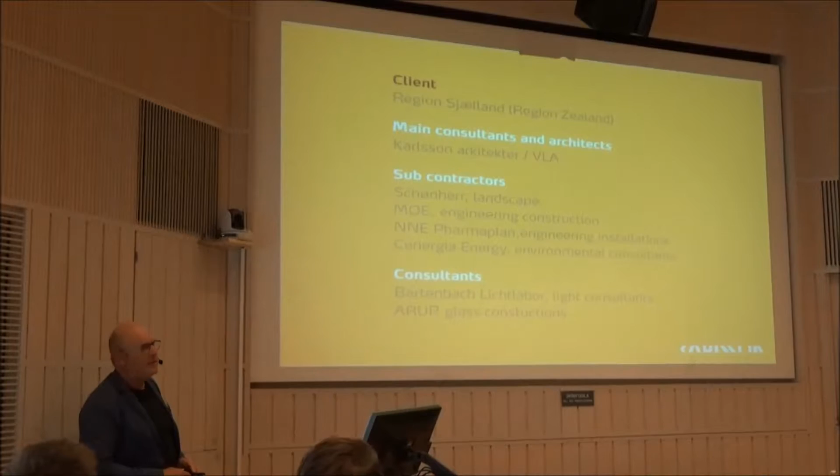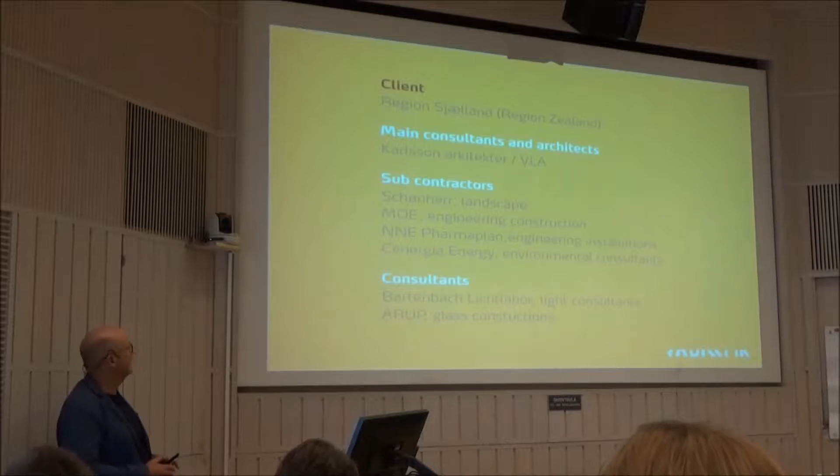The client is one of the 5 regions in Denmark, the region Zealand, the smallest in population, but the biggest in area, and they wanted to be very ambitious about trying to make a hospital to ensure the quality and the equality of the work with psychiatric patients.

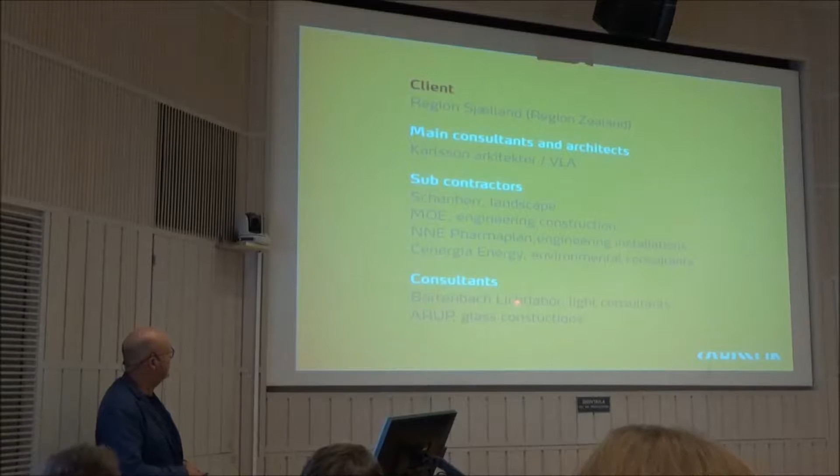These are the participants, and you could notice Karlsson arkitekter with the landsting, and also NNE Pharmaplan, who's been working with the engineering of the installations, the light, the electricity, and Bartenbach from Austria, who has been consulting on the light design, both daylight and artificial light. This is me.

The project is a part of the investment going on these years in Denmark for mainly somatics, but also psychiatry. And this is a project we've been working with.

It's between Odense and Copenhagen, but as I said, a huge area, any scale anyway, with a very spread out population.

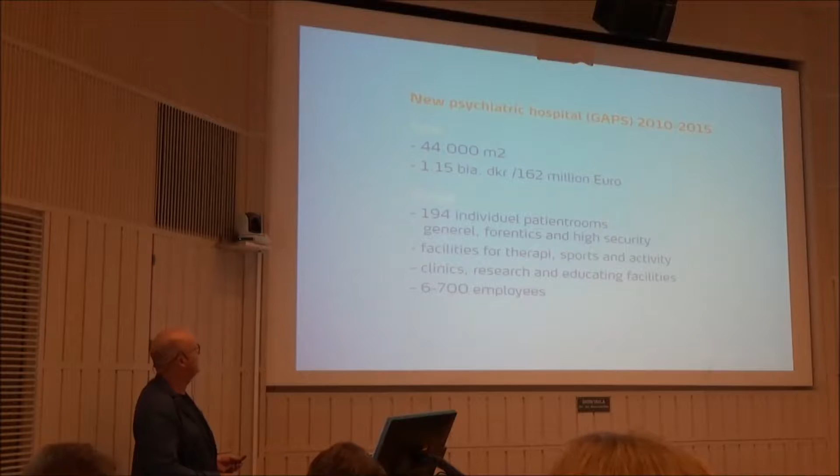These are the figures. Approximately 200 individual patient rooms with the facilities going with that. Clinics for 200-300 daily visits, research, education.

44,000 square meters, and it's a small amount of money in the overall investment going on, but it is absolutely the biggest investment in psychiatry in Denmark in this period, and for about 150 years or something. It's the biggest and most ambitious investment.

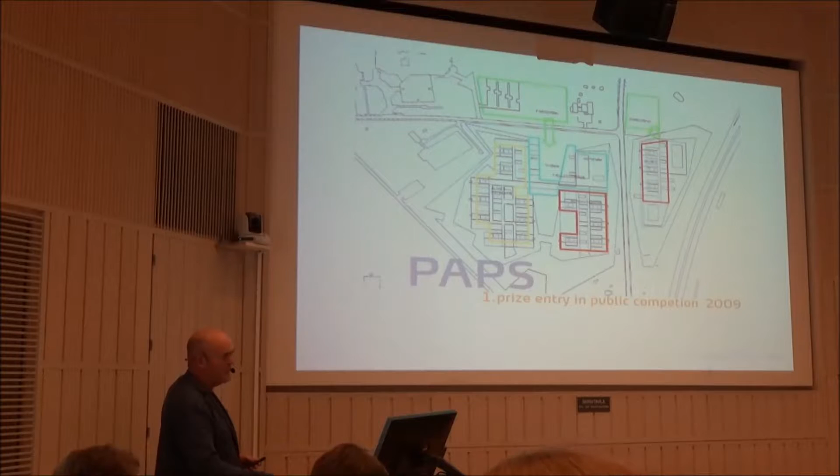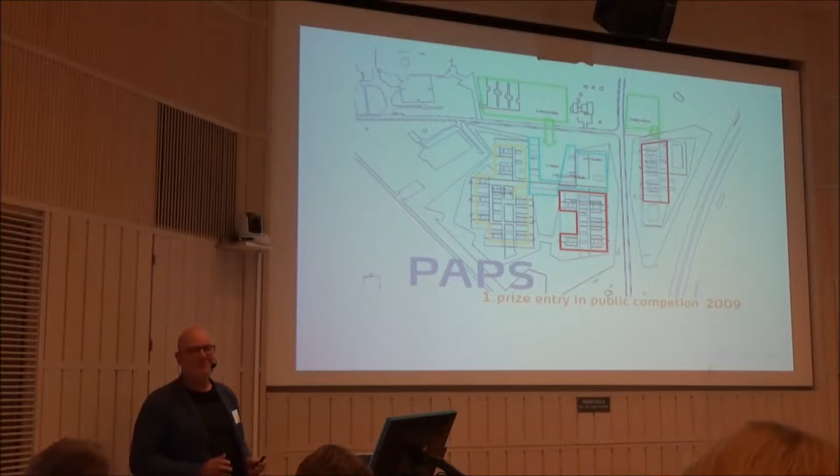Very, very ambitious, very dedicated client, a two-phased competition, an open competition which we won. And I have a very small firm. We're not 300 people, we only have one office. We are 10 to 12 people, but engaged into each client relation and each project.

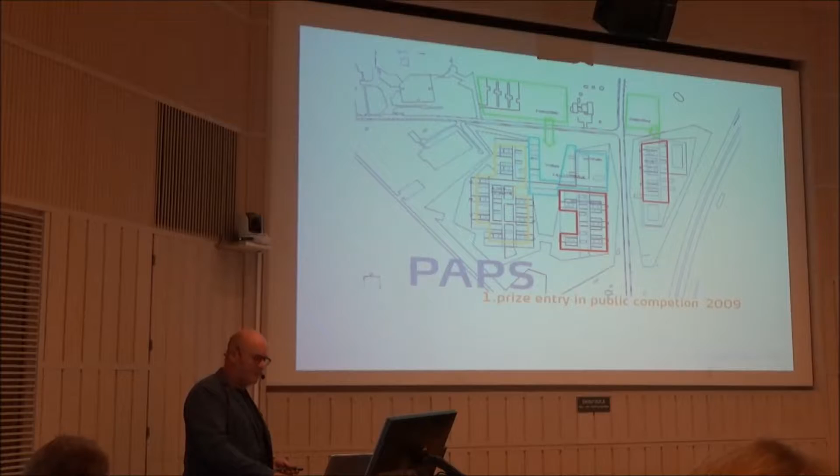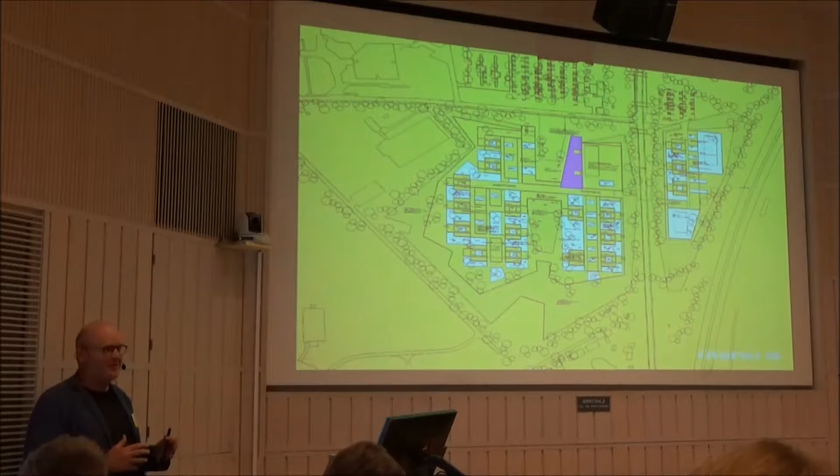We had no experience, and few had basically experience with how to build the new facilities for the new way of treating psychiatry. But we won this competition, and we went into this work open-minded, based on some basic ideas, and then entered into a close relationship, working together with the psychiatry. Psychiatry learned about architecture, and we learned a lot about treatment of psychiatric patients. This is the basic idea.

I have to show this before I talk about the light, because we can't separate light from space. We can't separate space from materials. We can't separate the program from time, economy. Everything works together when you're dealing with architecture, making architecture.

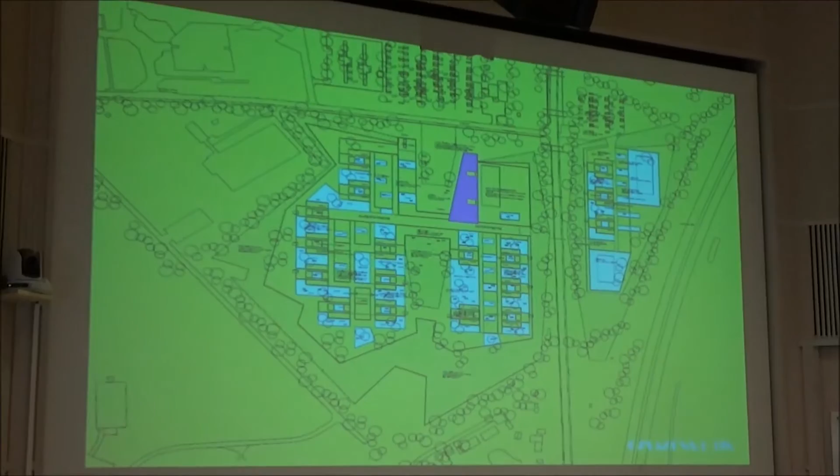This is the site from the early stage. It's a green site, some old football fields. But we turned this around to say we're not going to build in a park, we're going to build taking the park into the building.

And that has to do with how psychiatric patients and treatment actually works. So our ambition was, at this level, to be able to deal with all the programming that was coming into the project in the process to be expected, and to make sure that we could make different kinds of realities inside, according to each patient, each state the patient is in, in the process of recovery from very sick to well. And that also has to do with light.

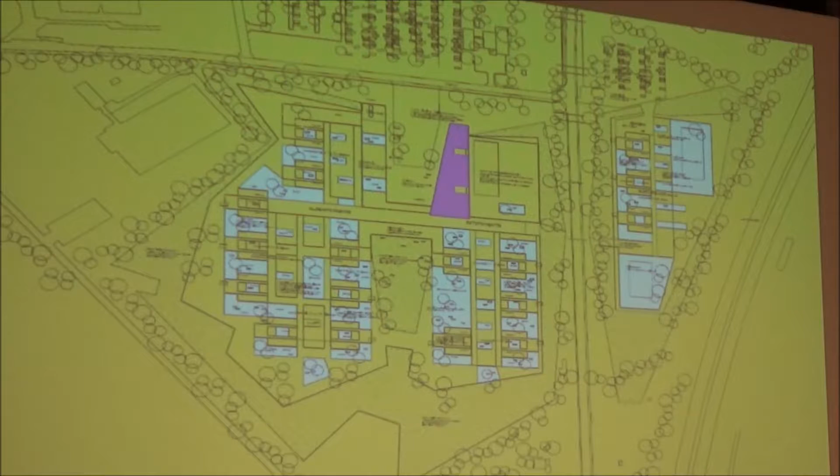So basically, around courtyards, closed from the outside, but open inside itself. And then one point rising up to show an investment of 1.2 billion, the ability of competence, of education, of research, and so on.

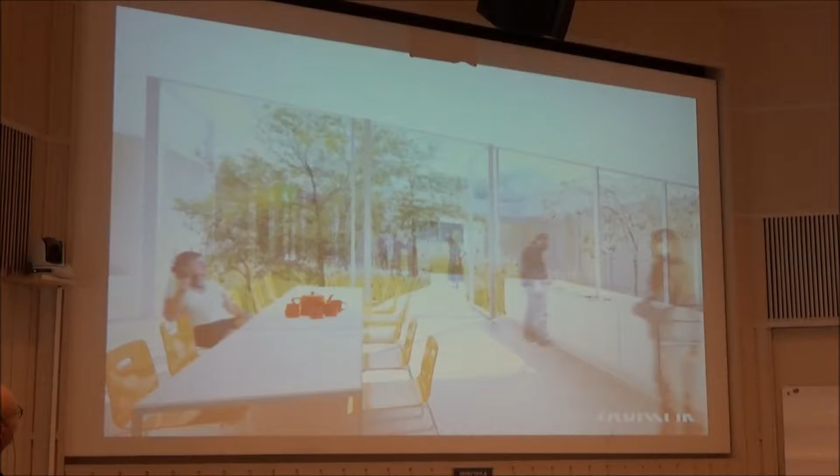These are drawings going quickly through from the competition, showing the ambitions at that level for the project. That sort of speaks a bit for itself. You will want to ask anytime within the limit, of course, of time. But as you can see, light and access to outside is from the beginning a very, very important issue.

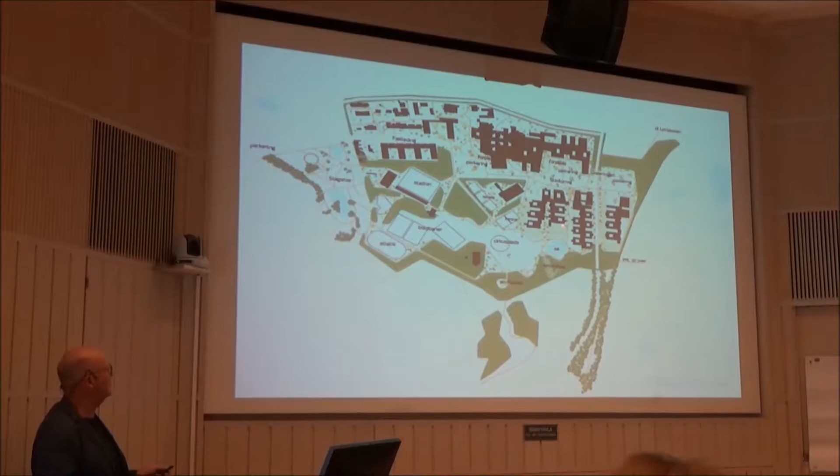This is from the atrium and the competence center, as they call it, the high rise. And this is the site. It's urban, not like Stockholm or Copenhagen, but it's an urban structure, and it's a recreative structure, so that the park from the center of the city actually goes through the new hospital and allows access from the public into the hospital.

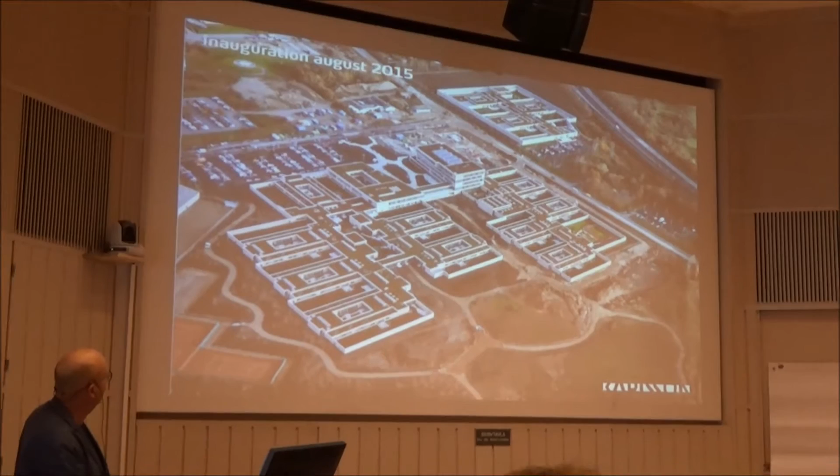This is the site, almost finished last year. You can sort of see the layout as it is. And these are some keywords.

I've just touched it, read it yourselves. What was values and goals in the work with the psychiatry?

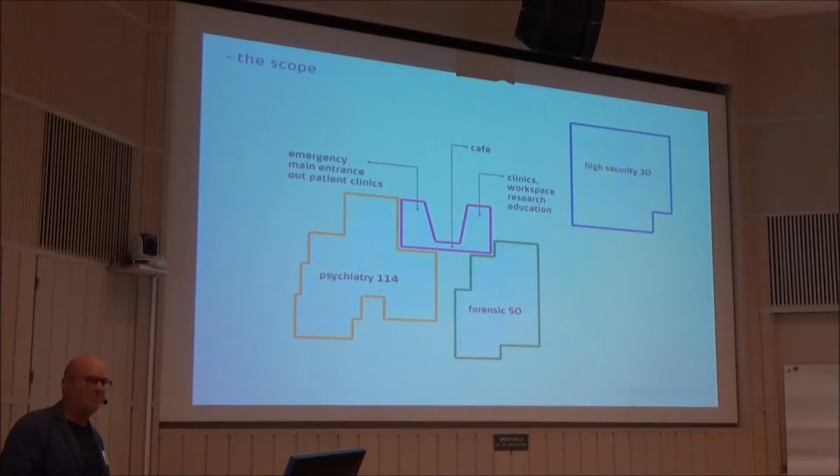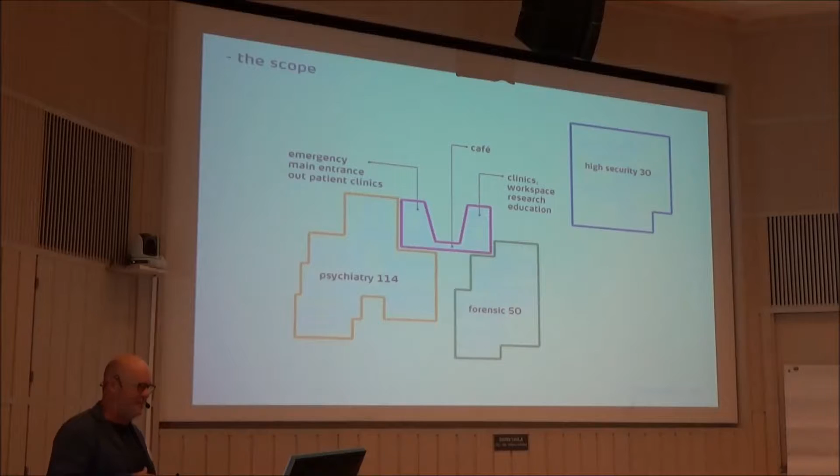This is the scope of today, basically, just a layout. There's a lot of difference from general psychiatry to high security psychiatry, as some of you probably know. But we have worked with the same topics in dealing with how to support the work with psychiatry, though it is of course different between general psychiatry, forensics, and high security. We'll show you something from general psychiatry, where it has been possible to work with the ideas mostly, and therefore most interesting to see.

Basically, we organize wards based on the idea of having a social structure for a patient to deal with, and also for the staff to have a known base to work in. Staff and patients know each other. You can't just move staff around the psychiatry hospital, because then you lose the knowledge of each patient, and if you lose that knowledge, you can't give empowerment to each patient, and you sort of have to start all over.

So this is the structure, but behind it there are competences coming, working from workspace bases and working in different kinds of rooms, from informal rooms with no real purpose, like meetings we probably have had this morning, you just meet somewhere and get into a conversation, to more formal meeting rooms, activity rooms, and sports rooms, etc. Working patient to patient and patient to staff.

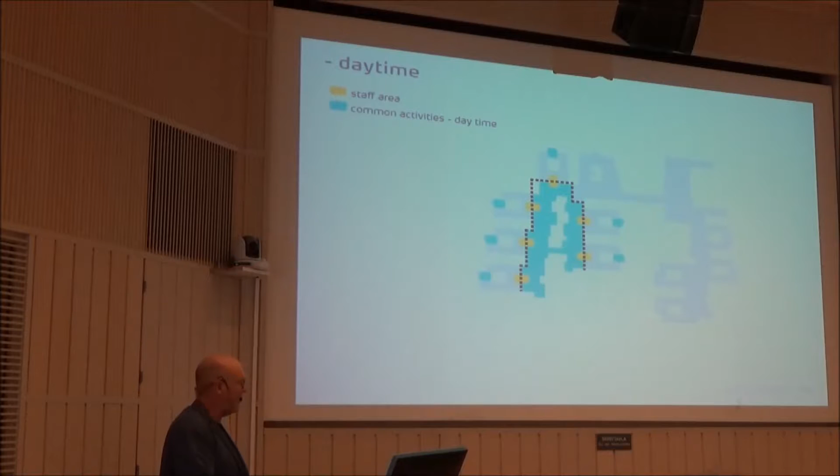We call these pigeon rooms - I think it was my word once. Like, you know, when pigeons, they sort of come back and sit together and move their wings, and they have messages to share. This is where you meet, and you know that you can meet each other.

This is then how we can organize it - it has not to do with patients, but you can actually have 2-3 wards working with the same treatment topics and so on.

So that's how we got together after we won this, the real task. That's how we work - we want to find the best co-workers in the areas that we don't cover ourselves.

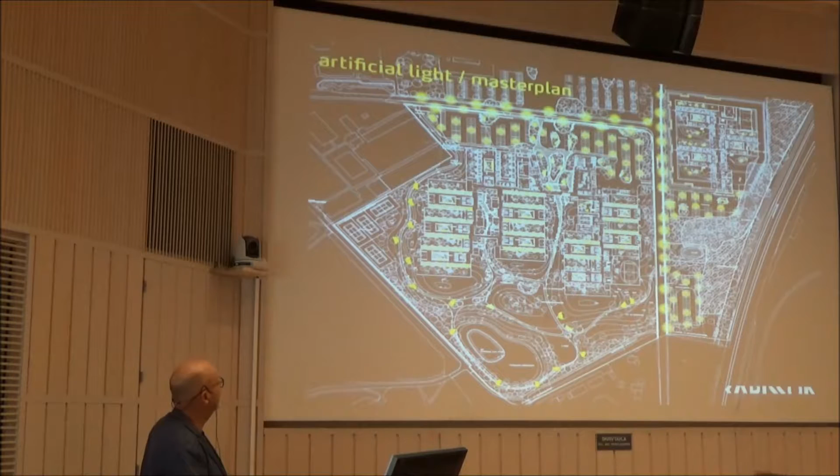This is just to show that the planning included everything, not just one room, not just one lamp, but the way the building sits on the site, the way you move around, and the way it shows itself during the night.

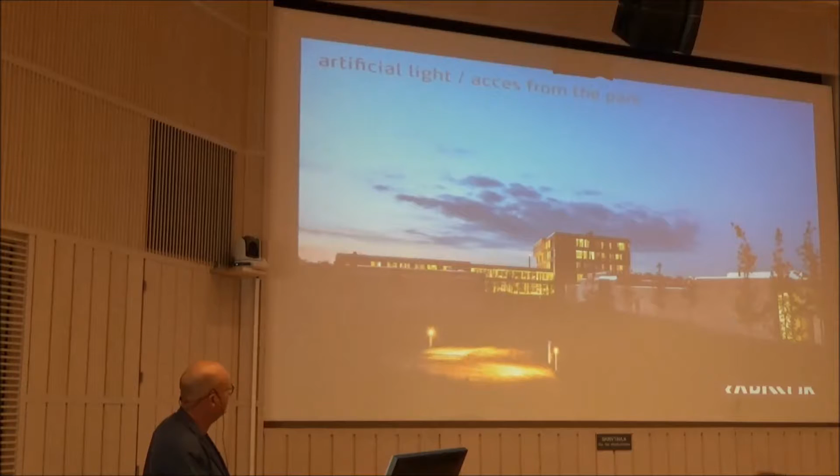This is from one month ago, I think, and you can see the closed one-storey buildings, and the high-rise which is still open here, late evening. This is the main access to the building that shows itself when you enter.

It's been very important for us to work with the architecture in a way that, if you're a patient entering this house for the first time or even the second time, this is not the best days of your life. It's very important that the architecture is not the architect's dream that might scare you or intimidate you. We really wanted to keep everything very simple, very easy to understand, and still of course have the expected complexity.

Basically, the idea is that we have a hierarchy from the patient room with very few elements, very few stimuli, and then different levels where you can work with patient and staff, and you end up in reality, because the whole idea is to return to reality and be able to work in real life, though you might have some psychiatric disease.

This is the biggest one, this is the outside, you might say. This is pictures from the entrance, and these pictures will show you some of the way we have been working with light. This is an entrance that I think could be a school or a small business or something.

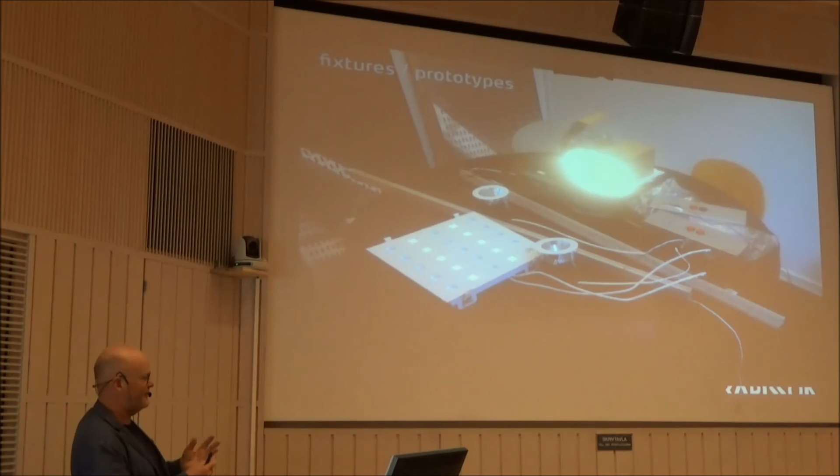Yeah, these are just pictures to show it's custom made into the house in any way - the bulbs, the curves, and the positions, to give the difference of light.

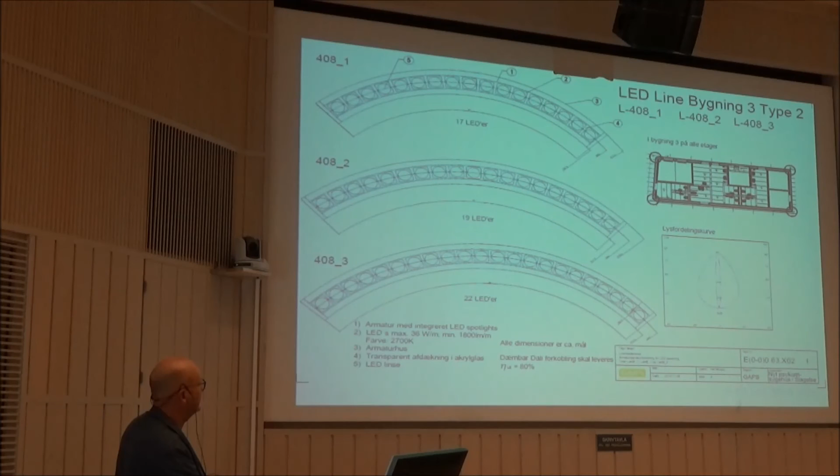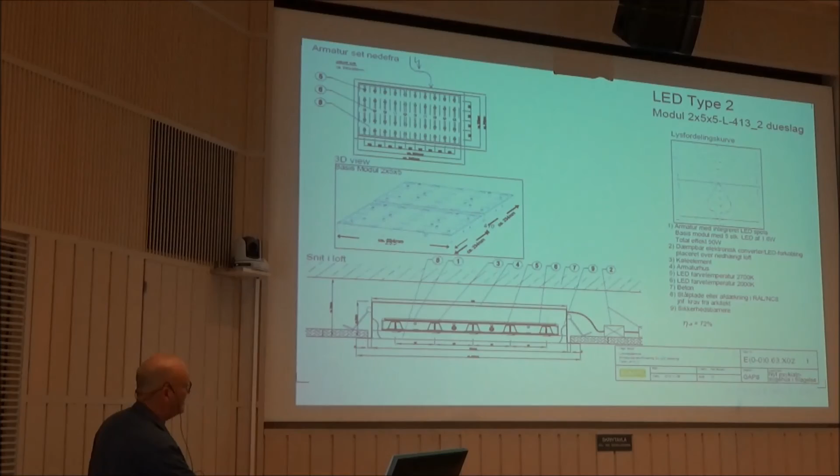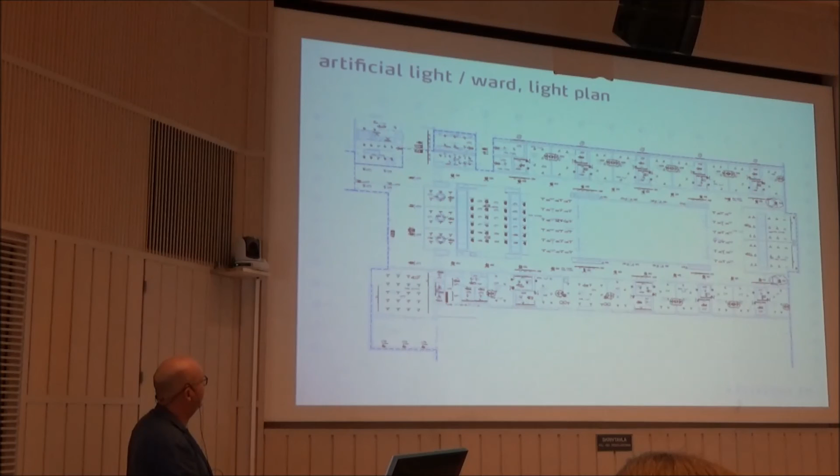And this is just the schemes. You can see from early stages that we define where to have, and not the same level of light everywhere - we want the light to be different. That's interesting, we like that, and it shows where activity is going on. There's a plan of fixtures that follows that. And this is an example of these milieus we've been working with.

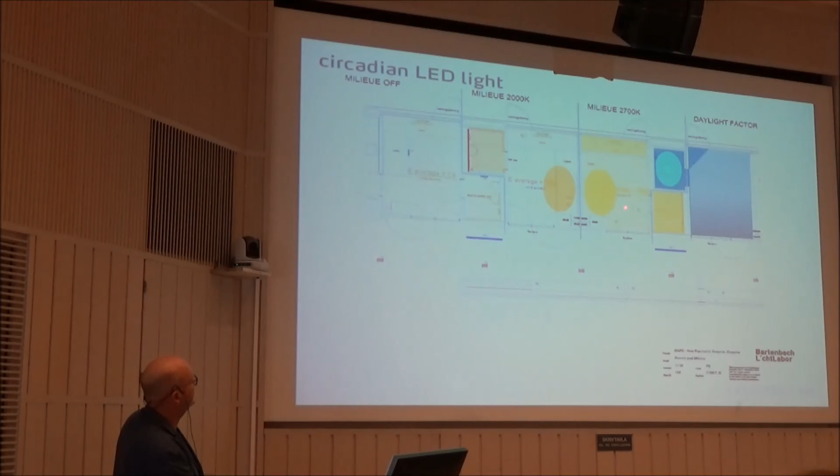The scenario is in a patient room - from nothing basically, very, very little in the night, then 2000, 2700 - it's not quite that way, but still, it's a basic idea to work with, and then the daylight.

But I showed it - I promised the client not to, but I showed it because now, after 6 to 9 months, we have some results already about the house anyway. We don't know if this is due to the light, but there's a huge reduction in violence - huge reduction. And as one of the staff said, people who hadn't taken a shower for 15 years are smelling well and took a shower this morning. So we think it works. Yeah, that's what I have for today.